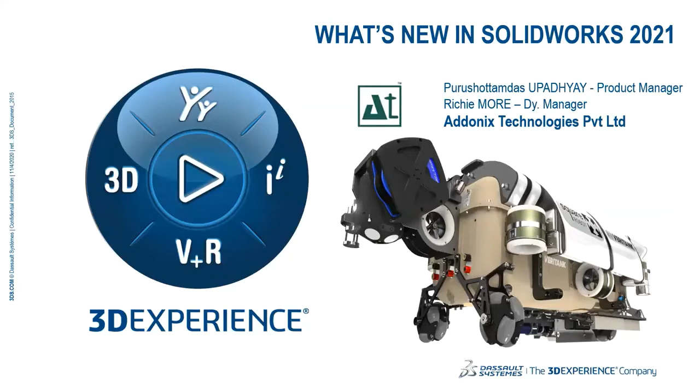Like every year, SolidWorks, 25 years later, even with millions of passionate users, we are again showcasing another powerful release of SolidWorks version 2021, like in the rest of 2020. This release again is very exciting, and we have very powerful features and some more exciting tools they have added.

Before that, I would like to start with the corporate profile. Addonix Technologies Private Limited, founded in 1996, is an authorized reseller of SolidWorks since 1999. We have headquarters in Goregaon, Mumbai, and a branch office in Thane, Mumbai. Along with SolidWorks, we have other business alliances like AutoCrib, which is a very exciting solution for industrial vending machine solutions. We have CIMCO, a very powerful tool for Internet of Things or Industry 4.0 revolution for manufacturing shop floor, which is a CNC VMC automation solution. We also have Envision Tech, a metal 3D printer, and a non-metallic 3D printer called MakerBot. So apart from SolidWorks, these are our business alliances.

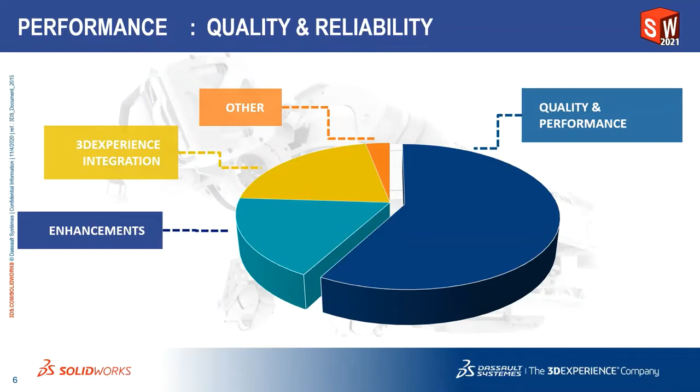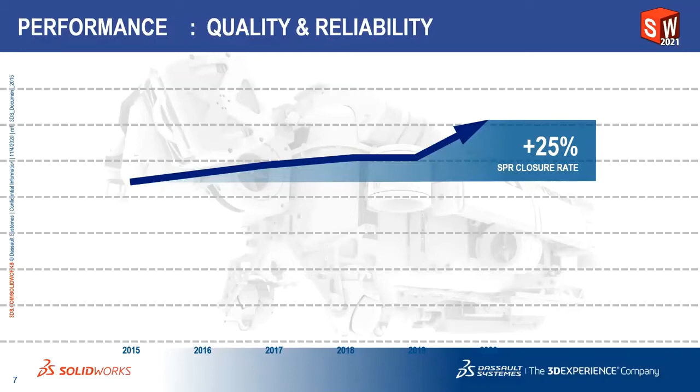So again, a very good number - a very good achievement in terms of performance and quality.

It wasn't just about fixing small or basic features or SPRs. SPR stands for Software Performance Report, which we normally report when testing a beta version, or when they release an alpha version, or sometimes during a service pack release. If we get any problems, we report it as an SR, but later they find out this is not a service request, or it's not possible to fix at that moment or in that version. So they convert it into an SPR, and that SPR goes to their R&D team, who work on it and try to fix it in a later version.

So the focus was on the areas that mattered most to you. They try to find out which SPR or service request is required by most people, or which problem most people are facing. They recognize that as an SPR and rate it with a severity level - severity level 1, 2, 3, 4, or 5. The severity level depends on how critical it is, as the most significant impact on all users. That's the criteria to rate any SPR as severity 1, 2, 3, 4, or 5.

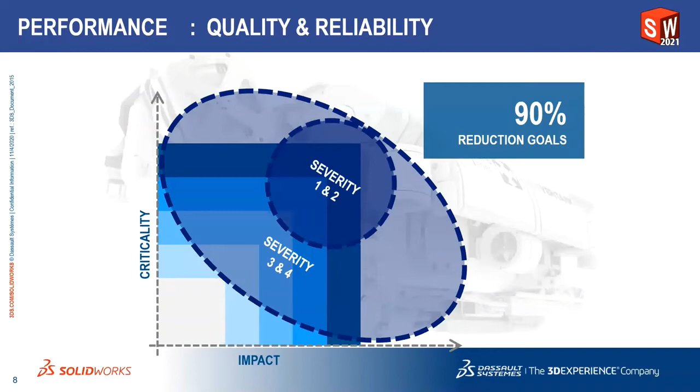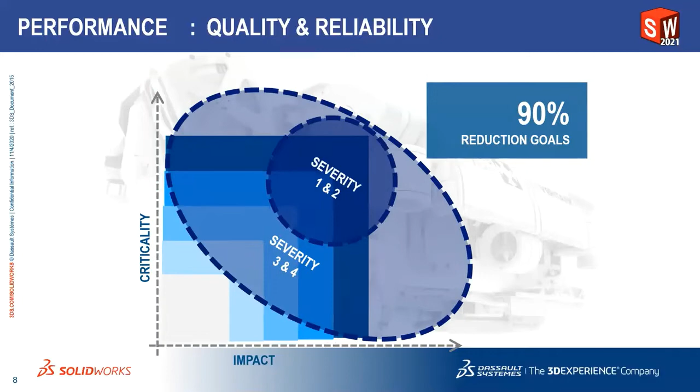In this version, their major focus was on performance, quality, and reliability, and it will give you the most impactful results when creating an assembly or large assembly, or working with large drawings. Those things will be much easier to use, and performance will definitely be improved.

Next, I'm showing quality and reliability improvements. Over the last year, we have seen a significant reduction in open SPRs for severity 1 to 4. In the earlier slide, I showed how they've taken care of severity 1 to 4 issues.

This is what they have rated, so they try to implement in this version. So in this version, their goal over the next release is to get this down to less than 10%.

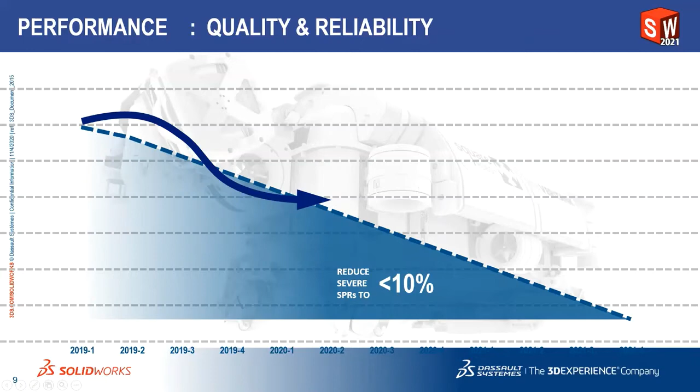So they have compared 2019 Service Pack 1 to 2021 SP4. So still Service Pack 1 is going to be released, but they have predicted that until Service Pack 4 of SolidWorks 2021, they are trying to reduce that severity rate, or SPR. So that is the major thing they have taken care of.

And it will give you the most impactful and powerful solution in day-to-day activities. So now that you are waiting for what's new features or all those innovative features, I'll invite my colleague, Mr. Richie More, and he will show you SolidWorks 2021 in action. What are the new features they have added? All those new features are very exciting, and it is very useful and impactful innovation they have done.

Yeah, thank you, Purushottam. Can you just give me the control? Okay, so I think the screen is visible to all of you, and I am audible. Am I audible? Yes, you are audible and your screen is there.

Okay, thank you, Purushottam, again for the wonderful start, and how SolidWorks 2021 has reduced the SPR ratios dramatically so that there is less impact on work hampered due to some critical issues in the software tool. Now users can enjoy the freedom of having the best tool in hand to design and then use that tool for manufacturing their product in a much better way.

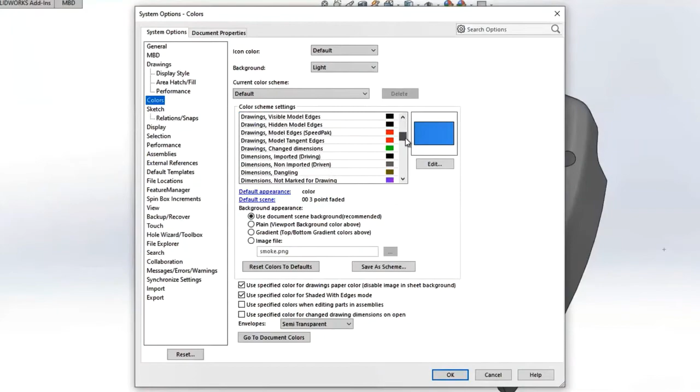In every part, whenever you create features, it has a absorbed sketch. In the sketch, you might see that there is a sketch, but unless I click in the feature manager tree, it is not seen - so either I hide it or show it to visualize. But now in the settings, we have the option to change the color for the sketches also. Let's consider that the sketch is inactive and we want to change its color - let's select this gray color and make it green. Click OK, and once done, now you can see that the color is highlighted again.

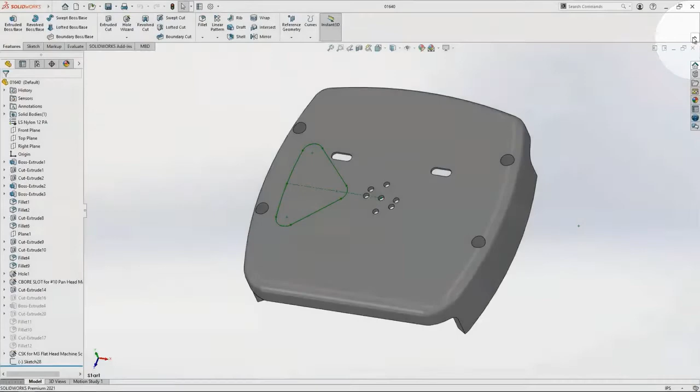Now also you have the collapsible command - the command manager can be collapsed, giving you much more room for the viewport, so you can visualize your product in a much better way. The commands get hidden and you can have a larger viewport for SolidWorks design creation.

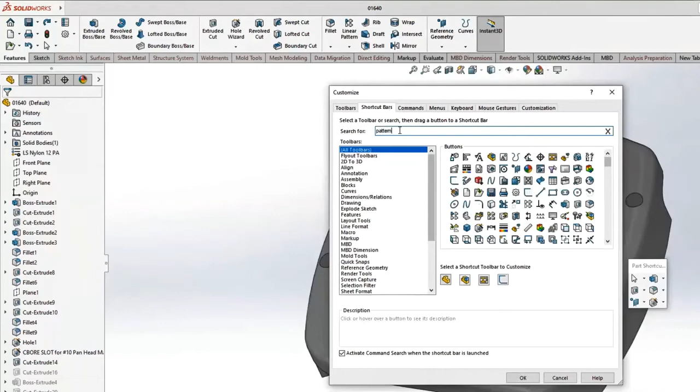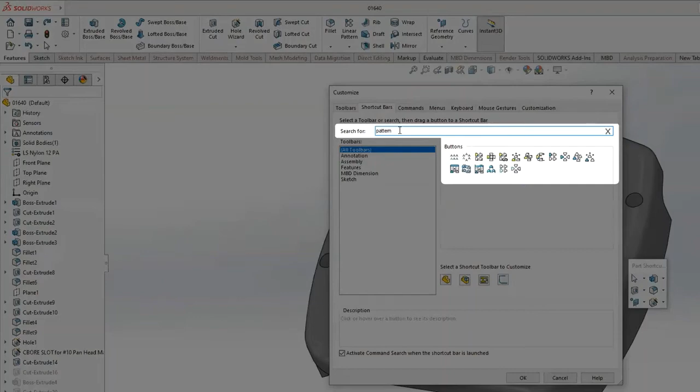Again, we have customization for shortcut bars. In the shortcut bar, we can make the quick access toolbar shown in the menu bar or in the command manager. Also, in the shortcut bar, we can now search for the command. Earlier, till 2020, it was not possible to search unless you go to the specific toolbar and find the right icon. But now we have a search box wherein you can search a specific feature, and SolidWorks shows a specific icon for that, filtering out the commands which are not appropriate. So you can search the option, and once searched you can add that to the shortcut list - just drag and drop it to the shortcut bar, and it is useful then.

So you can keep on searching the commands, whichever is required. We can add redo and undo commands also in the fly-out tooltip.

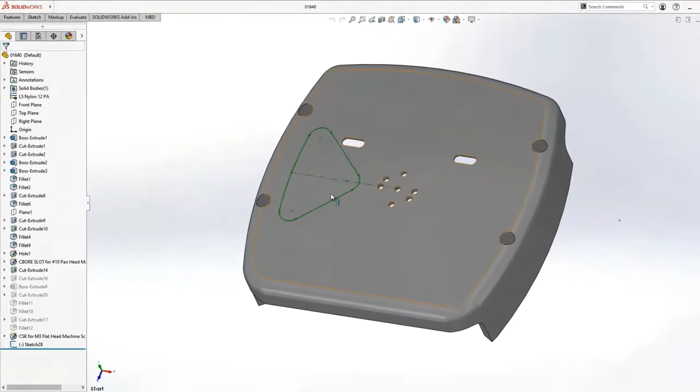Now, once the feature is selected, the sketch is selected, we can add the feature. So we are adding a through all cut, and we will pattern with the shortcut key. So here we are adding pattern.

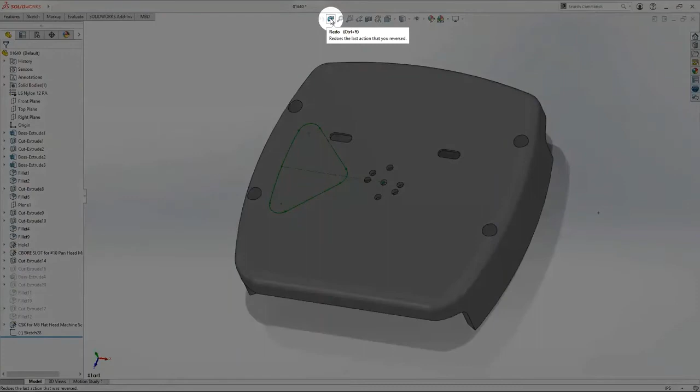Now, just to note that we already had the undo button, but the redo option was not available in SolidWorks. So now in 2021, we can redo the sketch. Also, we can redo the features. So if sometimes by mistake you have made some changes, you can always redo or undo the features.

So this is about user experience, wherein you have the quick access toolbar. You can collapse the command. You have search commands, wherein you can customize your shortcut bar or probably the flyout tooltip. Then you have improvement to color options, so you can have sketches and you can add colors to that. And we have support for redo for part features as well.

So let's go ahead with parts. We have interesting features in the part modeling environment. Here we have a square robot. In the square robot, we are going to look at the features. So we are displaying some display states, and here you can see a sheet metal component.

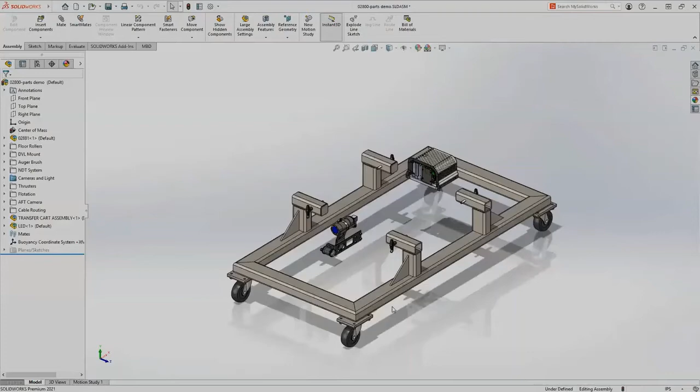The sheet metal component is very useful when you create with SolidWorks because you get a flat pattern. But earlier in 2020, it was not possible to have the rounded edge flanges. So let's consider the sheet metal. Here we have the round edge, round corners, and we want to have a protrusion of sheet from these edges. So now with SolidWorks 2021, we have the option of edge flange support for circular edges.

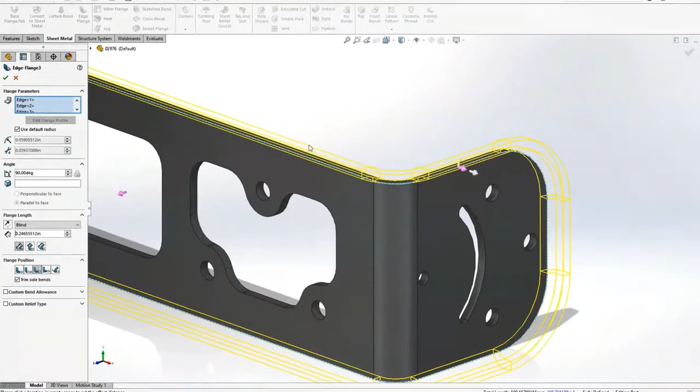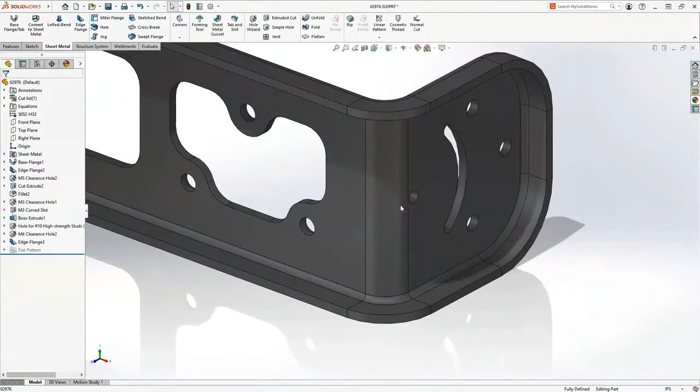Here you can select the tangency and you can see that a propagation of sheet propagates throughout the tangent and has the circular edges also. So it has similar outputs, like you can select the position of the flange or where is the material. Once you click OK, you can see that you get the edge flange at the circular edges also. Again, when you flatten it, you get a flattened out of this whole component. So in this way, we can create edge flanges for the sheet metal.

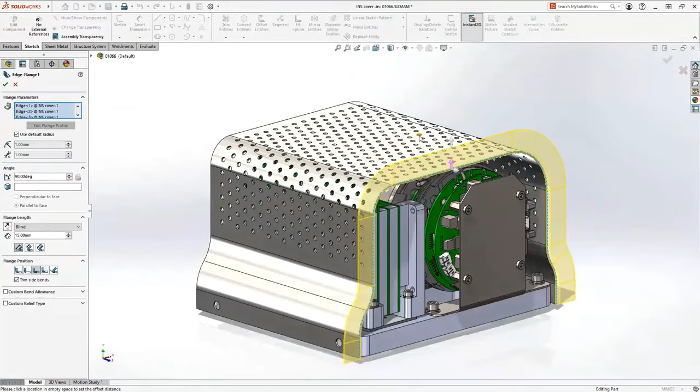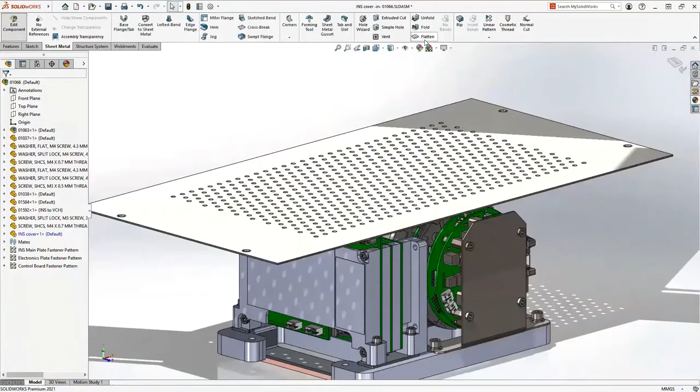So again, here we have the same component wherein we have created the same edge flange. Now we can edit the existing edge flange. We can, let's say, reverse this, reverse the flange length, and probably we want to add an angle to this protrusion. So we can add a 45-degree angle, and this kind of complicated edge flange can also be created in the SolidWorks sheet metal module. Again, the flatten is possible, and you can unfold and fold this kind of components.

So very easily you can create edge flanges on circular edges, something like this. Earlier till 2020, it was not at all possible. You could only do edge flanges at specific edges, and it would not be continuous. So it is a very great enhancement in sheet metal, wherein this difficult task can be handled very easily with a simple click.

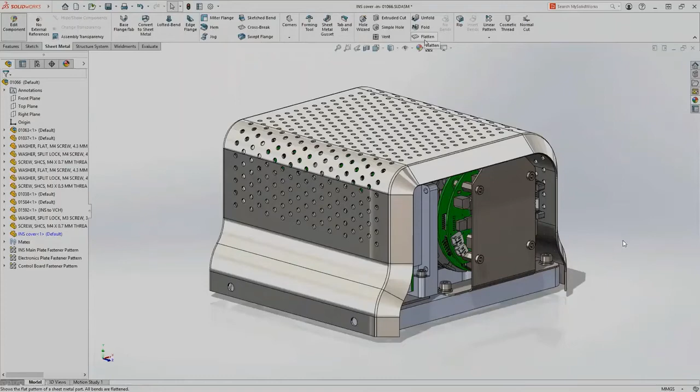So here we have an assembly which is in exploded state. Let's try to collapse it. So right click and collapse, and we have the assembly. Now this assembly has textures and appearances. Let's save it as a 3MF file.

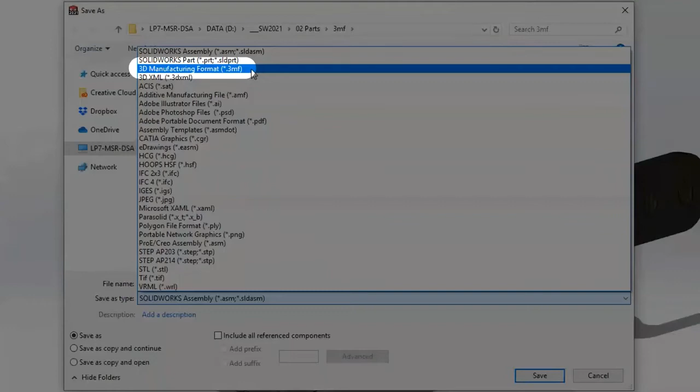So 3MF file is very useful for 3D printers, and this file format is supported by most of the printers. SolidWorks had the support of saving a file, SolidWorks part or assembly file, as 3MF, but it was missing some features. So let's see it in action.

So in the options, now we have new options of include material and include appearances. So whenever you save a file which has textures, which has appearances, which has text and the material properties, it also gets saved in the 3MF file. So once you save it, we'll save it to a location. You will see that very easily it is saved.

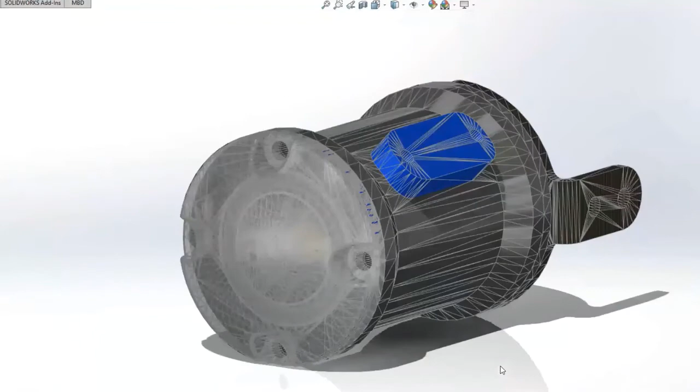Now again, whenever you try to open the file in any other tool, for a 3D printer, or again with SolidWorks, you could see that the texture and the color both are maintained. Again, the material is maintained. So the file has the metadata properties now.

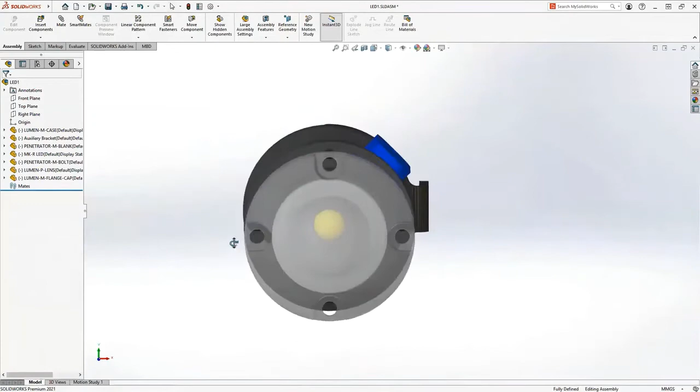So whenever you share this for 3D printing, or probably you use it again for 3D printing, you visualize the product in a much better way. Instead of just a random color, standard color, you have all the colors and the textures as well. So better visibility gives better results, so that you can print it in a much better way. So that is about the 3MF file.

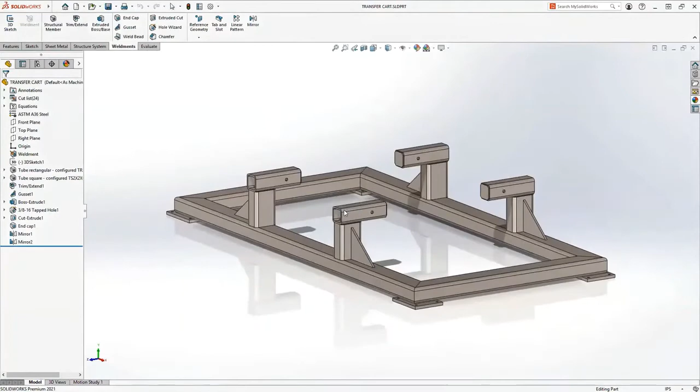Now let's go back to this component. Now most of the power users, what they do is they create weldments, and we have some miter arrangement. So here in the weldment, we edit the trim, and whenever we select the miter endpoint, miter trim, corner type, and the profiles are different, you could see that it is not having a proper match.

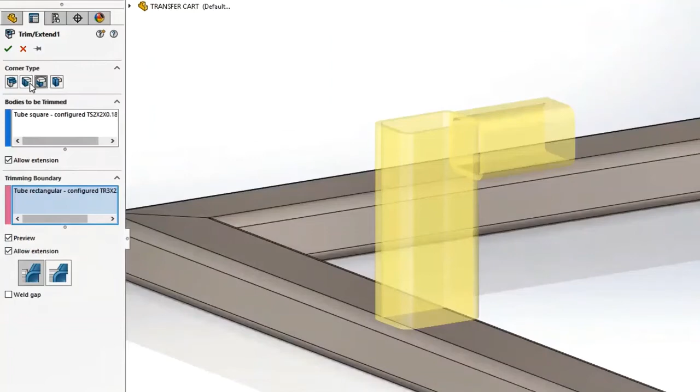For example, if we take a side view of this, you could see the profile is larger at the bottom, at the vertical side, and the horizontal is smaller. Now we want to make a quick arrangement, so here we have a new option, that is full flush miter. This is very new to SolidWorks 2021.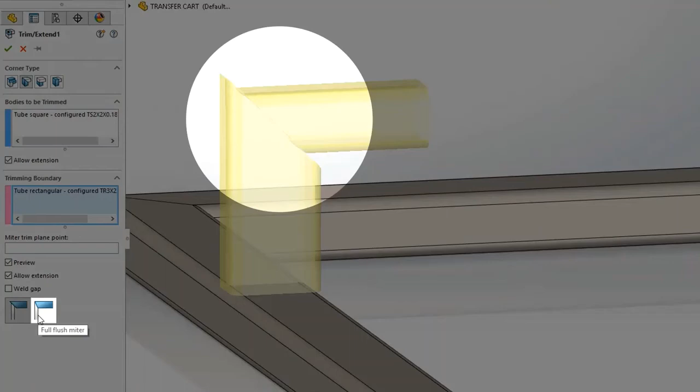So whenever you click on this feature option in the miter corner type, SOLIDWORKS will try to evaluate the two different profiles, and it will try to merge them in a much better way. Once you click, you can see that it manages to flush the miter for both different profiles, and the work is done. So this is how we can use the new weldment miter full flush treatment.

Now most of the power users use appearances to differentiate most of the components in the assembly or multi-body part. So this is a multi-body part, and we want to add appearances so that we can differentiate two zones of this part. Very easily it can be done by going to appearances, edit, and add color.

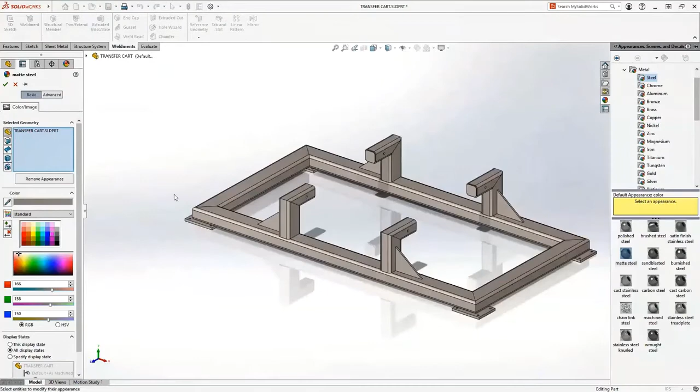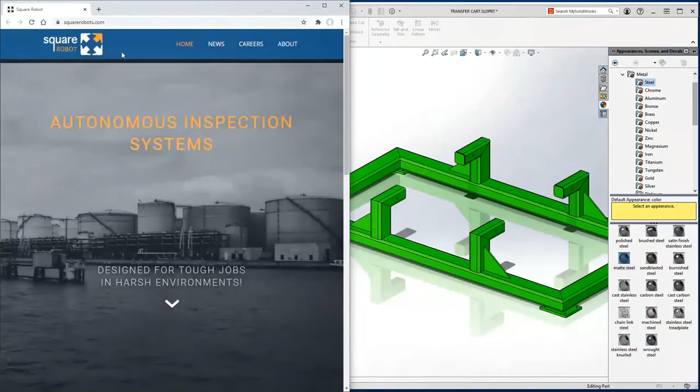But earlier we could not add a color pick from other applications. So what we can do is use a color picker here in SOLIDWORKS. Just minimize the screen. Probably you have a website with appearances and you don't know the RGB of that color. So if you want this blue color, we simply go to SOLIDWORKS, select the color picker, and drag it outside the SOLIDWORKS window, click it and drag it to the website. Here you can see we have picked the color outside the application.

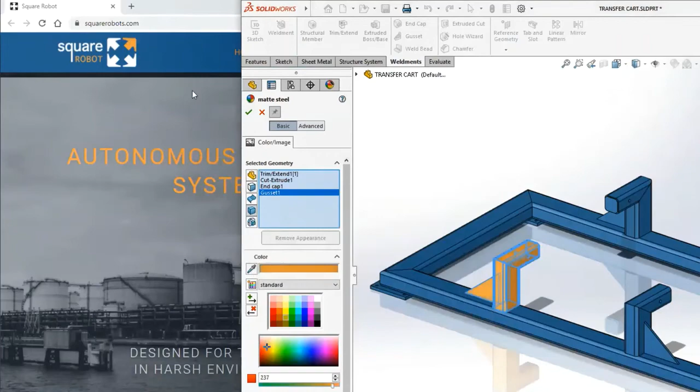Also, let's consider that we want to add that other color to the miters. So we select this miter and the rib, select the orange or saffron color, and click OK. Here you can see that very easily we have picked the color from this thing, and also since we had a mirror, it automatically adds color to the remaining parts of this. Very easily we can do this.

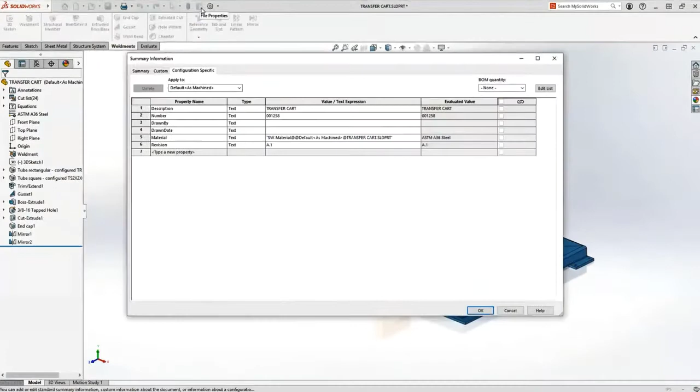Now most power users add custom properties to the part, so that the properties get propagated to SOLIDWORKS drawings as well. So easily you can go to custom, specific configuration specific, or custom, and we have property name, type, and value expression.

Now new to SOLIDWORKS 2021 is the equation type. So let's say we want to calculate the weight or cost. We want to add cost, so we have a new option, that is equations. Equation type is new to SOLIDWORKS 2021, wherein we can add equations and simply select the properties from the part properties. Here we are going to add a part property, that is estimated cost per pound.

And into that we can have the mass property from the part itself, so you get directly the cost of the part in pounds.

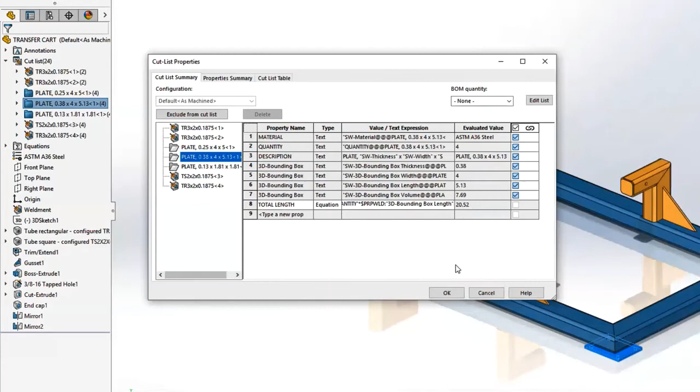Also we have cut list, so you can do that for individual properties, custom properties, or you can go to the cut list properties and have the equation wherein we can calculate the total length of the material. Here we have the quantity into the length gives the total length. So here also we can do this very easily. Earlier it was possible, but the equation was not there. Now this equation helps you calculate a lot of other things.

So in parts, we have sheet metal bend table support. We have edge flange support for non-linear edges, that is circular edges. We have a color picker for appearances, wherein you can pick a color from the website onto the part. You can save material and appearances properties in a 3MF file. You have support for equations in the custom properties, also in the cut list. You can have flush trim for miter joints in the weldments, and you have a graphics manipulator in the structural system.

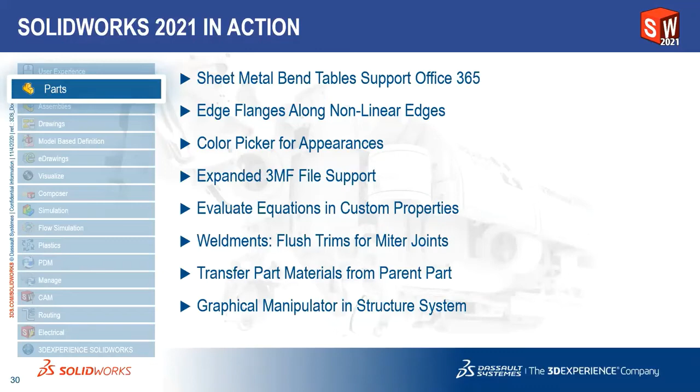Then we go to e-drawings. Most users use e-drawings to view more than 19 file formats. So even if you have a file coming from Autodesk or a file coming from Siemens, you can very easily view or measure the file in e-drawings professional.

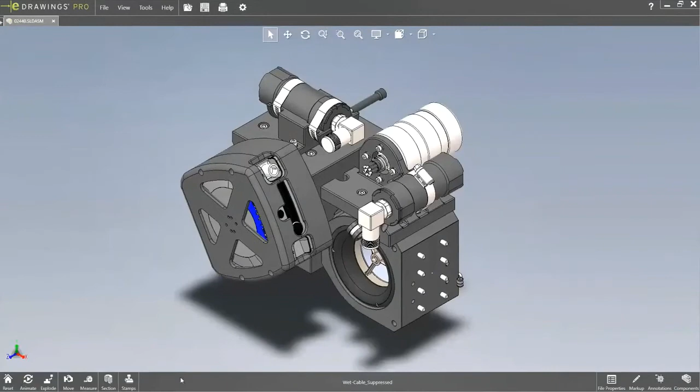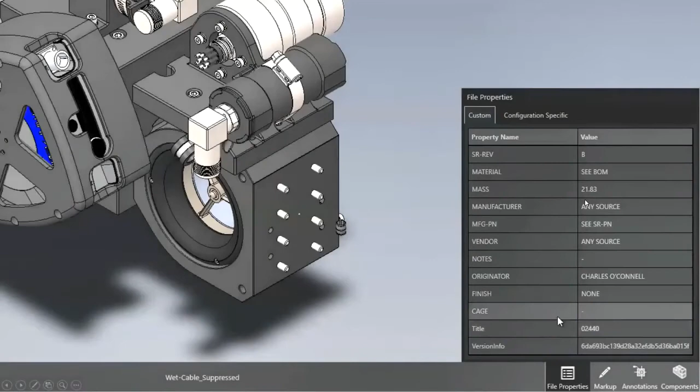Now new to e-drawings is that whenever you open a file, you get all the custom properties visible in e-drawings. So no need of referring back to the SOLIDWORKS file. Simply open the file in e-drawings and you have the custom properties as well as configuration specific properties also. So here we have custom properties, and whatever the properties were mentioned in SOLIDWORKS, you get the same look and feel of it in e-drawings. Also we have the configuration specific properties.

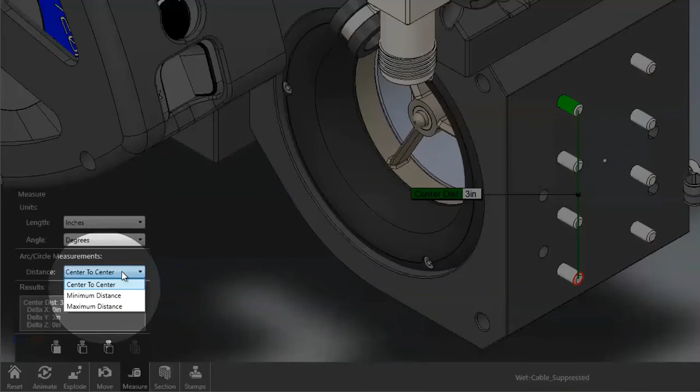Then we had a new option, that is measurement. Here in e-drawings we could measure very easily, but in the measure tool we did not have this option earlier, till 2020, to measure from center to center, minimum distance or maximum distance. Now it is very easily possible in e-drawings professional, wherein you can measure a specific distance for the components.

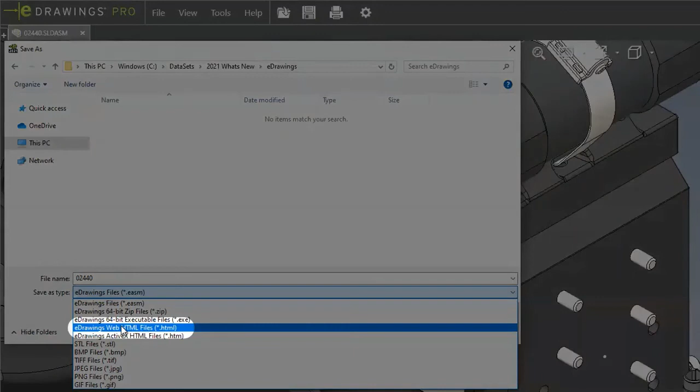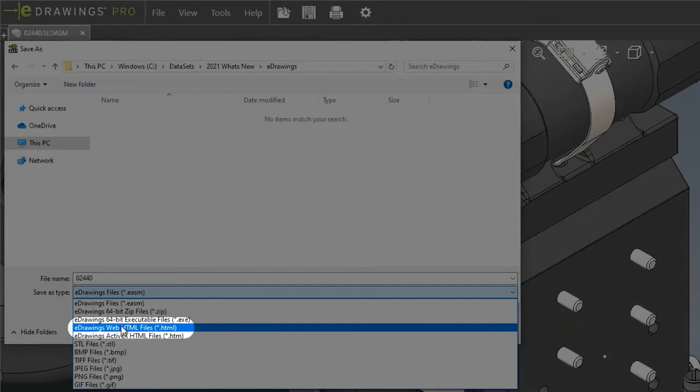And we have the normal distance. Now new to SOLIDWORKS 2021, we have the option of measuring WebHTML also. WebHTML was introduced back in SOLIDWORKS 2020 eDrawings Professional, and we could save files as HTML, which can be shared via email, WhatsApp, or a pen drive, and accessed via a simple browser on any device.

So it could be Windows, Linux, iOS, or a Mac device, wherein you simply open the HTML file and see the assembly saved from eDrawings Professional. So here we are saving this web HTML. Now in 2021, we have the option to enable the measure tool, so it is up to you if you want to allow measurement. We can visualize the assembly on a web browser without any software. New to 2021, you can now measure the same file.

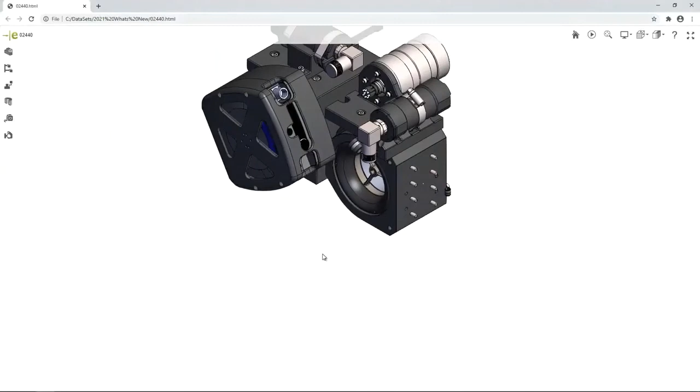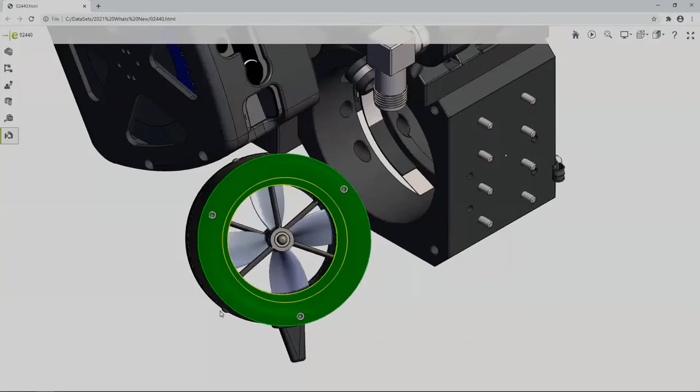This is a graphics file wherein you can have the measurement of the component. Also, we can have a pick and place option, where you select the component you want to move. So even in an HTML file, you can click the component, pick it, and drag it outside so you can have visibility very easily. This is all happening in a web browser, without installing any software on the system for viewing. Very easily we can convert a file to be viewed in a web browser.

So this is about eDrawings, wherein we have custom property support. We can measure in web HTML, and also move the components in the web HTML. That is it about SOLIDWORKS What's New for now, and I'll hand over back to Purushottam for promos.